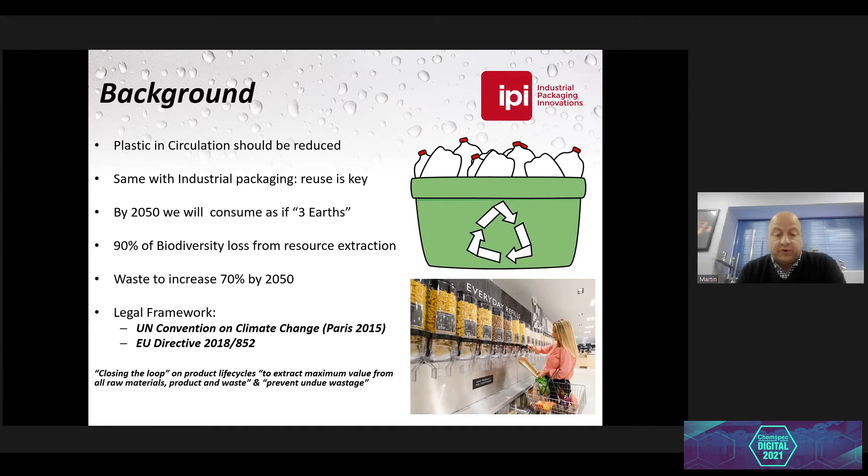The EU circular economy is very similar. The EU Commission has adopted an ambitious circular economy drive in parallel with this. The idea is to close the loop of product life cycles, with greater recycling and reuse, to extract the maximum value from raw materials and natural resources, saving energy and reducing greenhouse gases, and to benefit the environment and the economy.

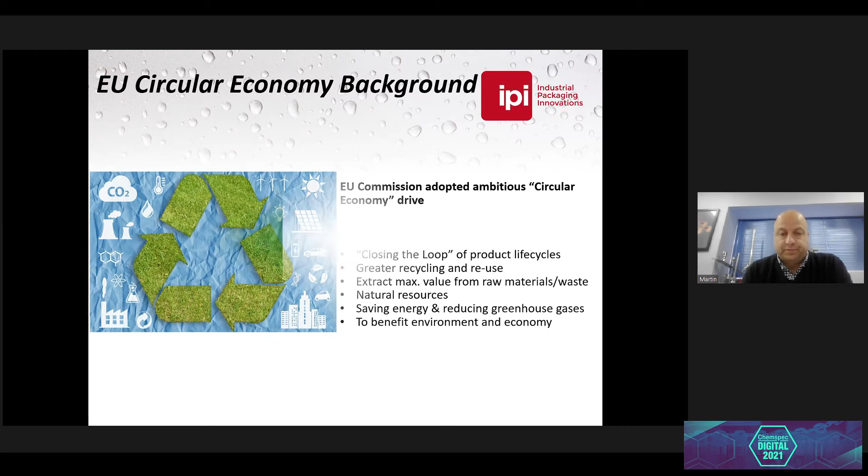A little bit more detail on that and how it works is the EU Green Deal. The EU Commission has launched the Green Deal to target no net emissions of greenhouse gases by 2050, to decouple economic growth from resource use, leaving no one behind. The action plan to achieve it is to boost efficient use of resources, to aim for a clean circular economy, to restore biodiversity, and to cut pollution.

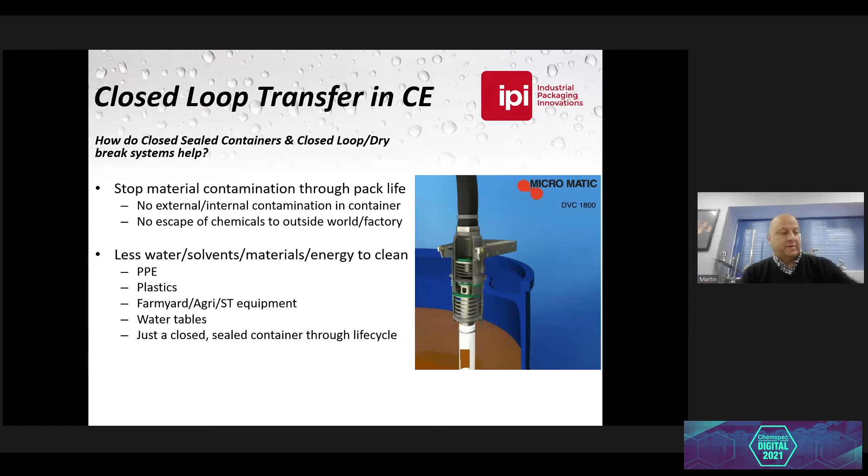And then closed loop transfer within the circular economy. So how do closed sealed systems and closed dry break systems help? They prevent the escape of vapors and drops. Hydrazine is an example where the amount in the atmosphere is kept below 0.02 parts per million, well in line with EU circular economy goals and protection of workers and the environment.

In IBCs with a closed loop system, they are reusable for the whole of the container's lifetime in a cycle of fill, ship, return, refill, fill, ship. So the closed system enables extending the life of the IBC or the container. It reduces the number of containers, reduces energy, water, and consumption, which is critical. And of course, you have a stainless steel IBC container option as well for ultimate lifetime.

On the right-hand side, you can see how the liquid is transferred from container to container. And then also the vapor is contained or recovered back into the container. So there's a two-way process, the liquid into one container, which pushes the vapor back into the original container. So it's a completely sealed system.

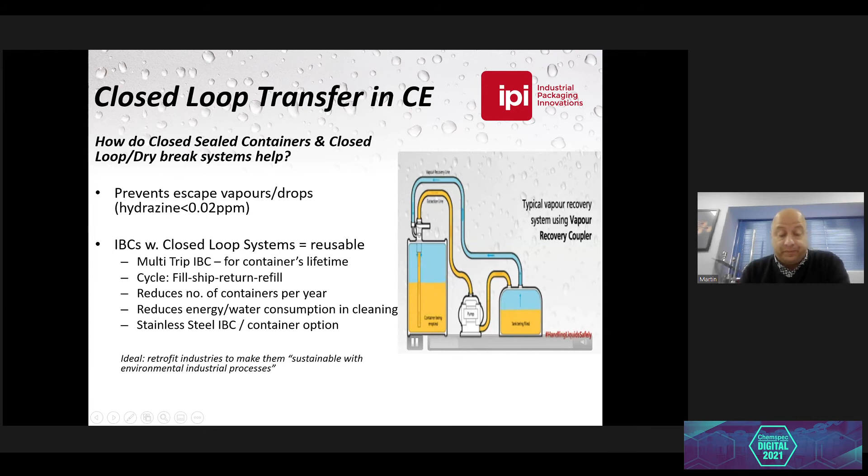I'm now going to show you a video which shows this in action. It's all very well saying, okay, how does this work in principle? But this is a company, Oqema, who have used the closed system within an IBC so that containers can be reused as long as the lifetime of the container can take it. I'll just play the video - it's about 3 minutes, and then I will pause at various points to explain it.

The initial part of the video shows the filling of the container at the customer's site. In this case, it's with hydrazine hydrate to go to a power station. So a little bit of scene setting there.

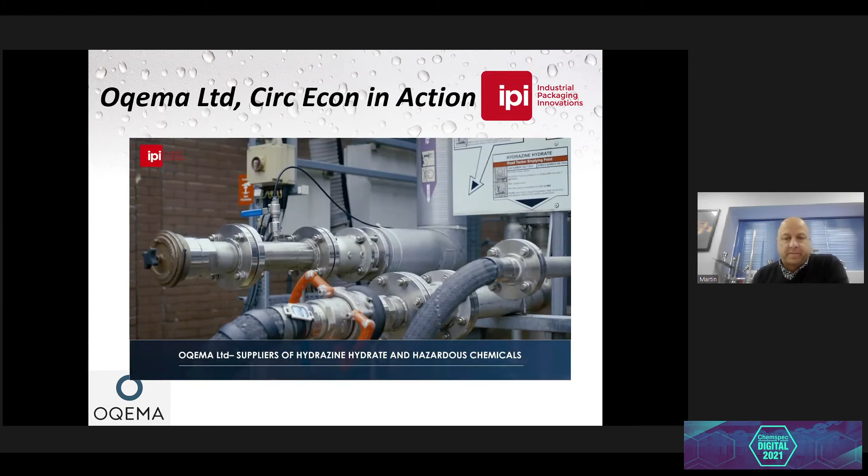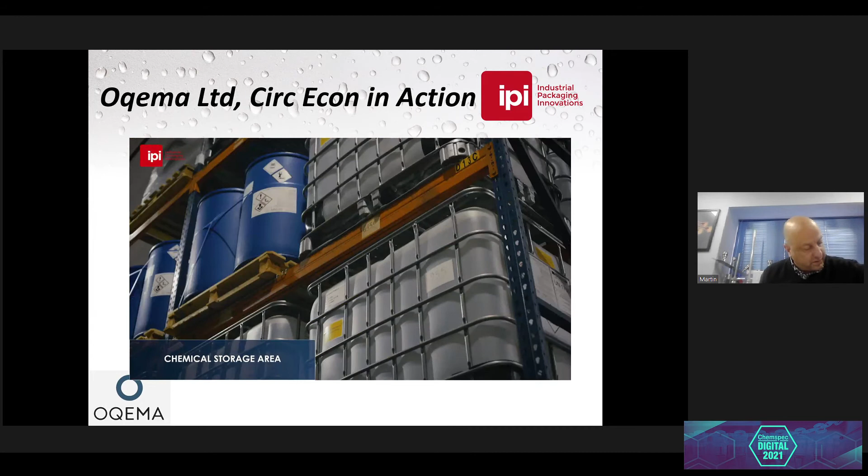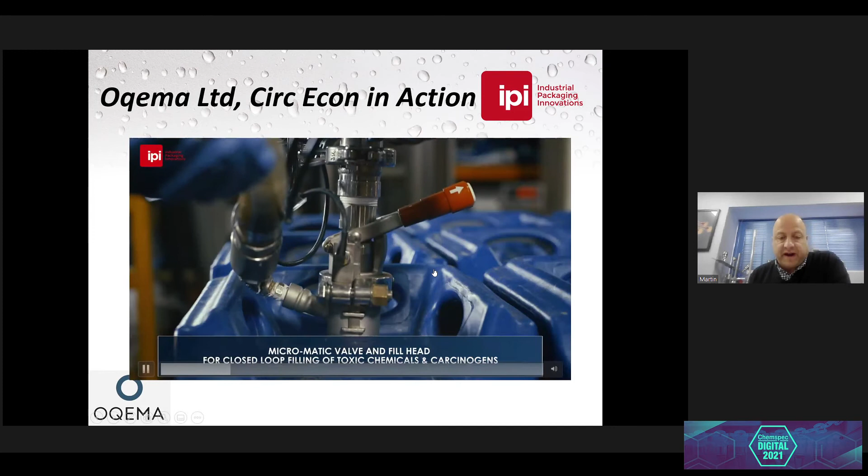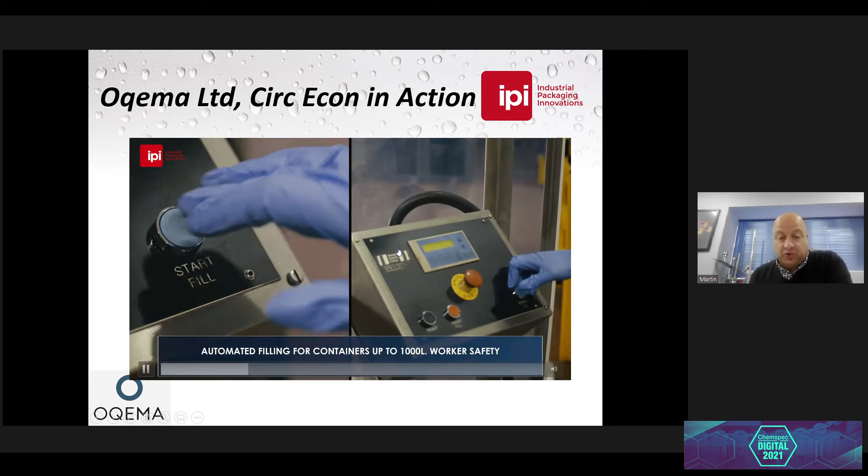So you can see various types of containers are filled from, that's a 25 litre can, up to a 200 litre, which you'll see in a moment, and an IBC, which you will also see. Totally secure filling.

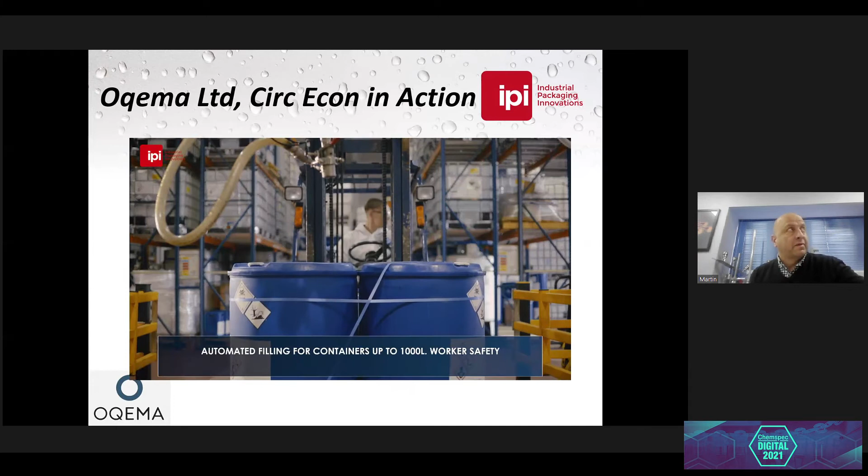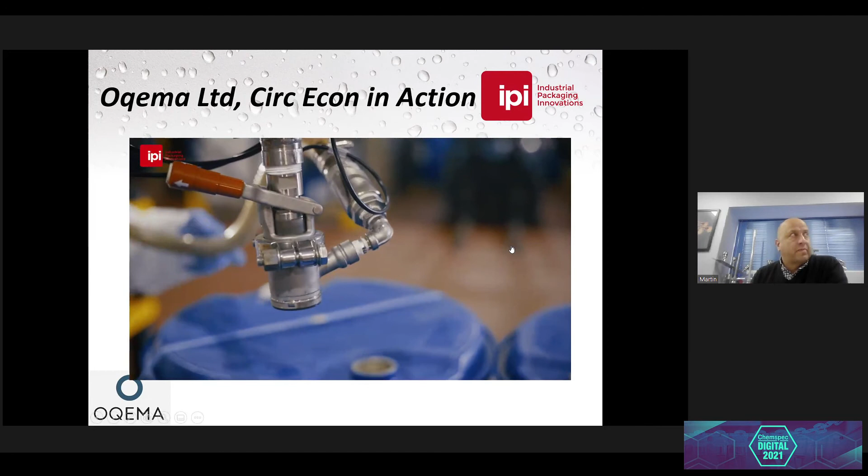It's been invaluable. It allows us to transfer carcinogenic chemicals safely at our facility with no exposure for operators, and also our customers can dispense products safely too with no exposure. We fill it through the valve here at Lansdowne. Our customers dispense through the same valve too. There's no exposure from the valve itself because everything's a closed system. It's a lot more robust because it's made of stainless steel, and it's provided us a high degree of integrity. It's been a real game changer for Lansdowne Chemicals.

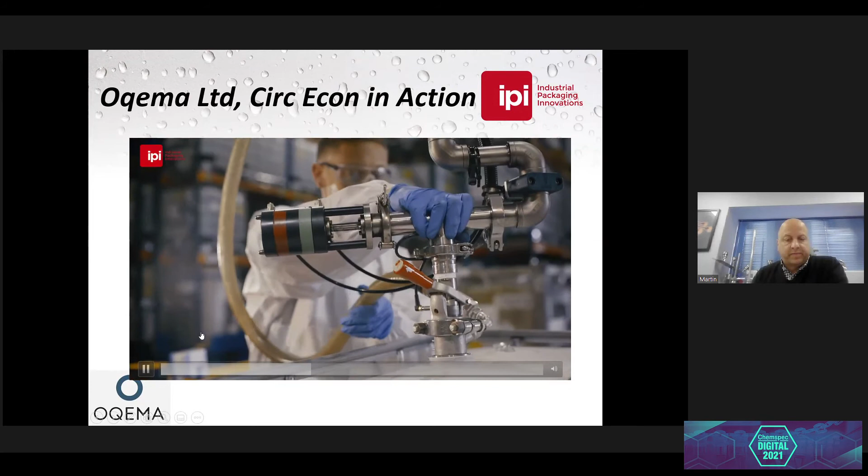Oh, sorry, moved on there. I shall go back to where I was. So what you've seen so far is the filling of the containers.

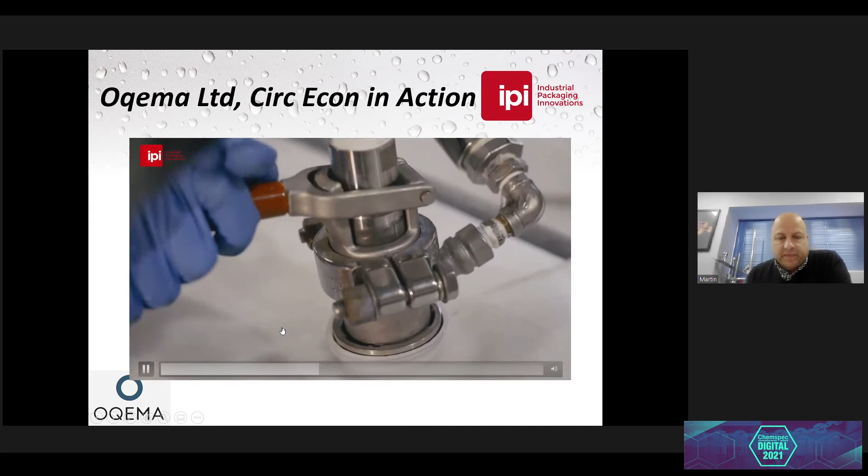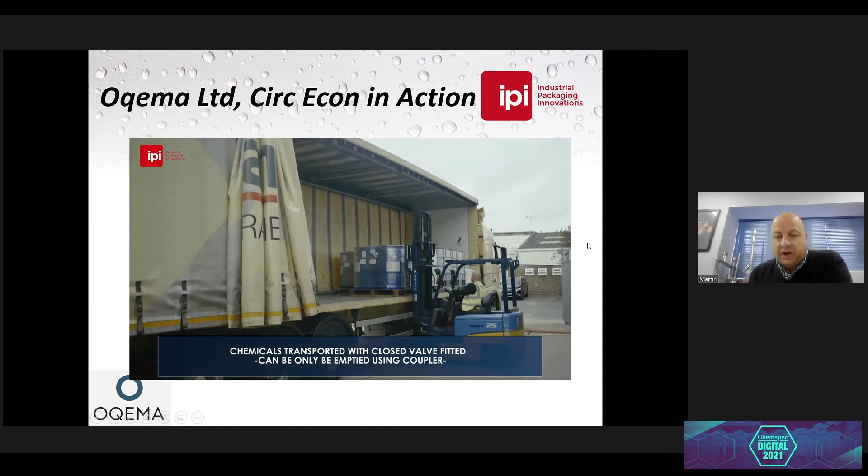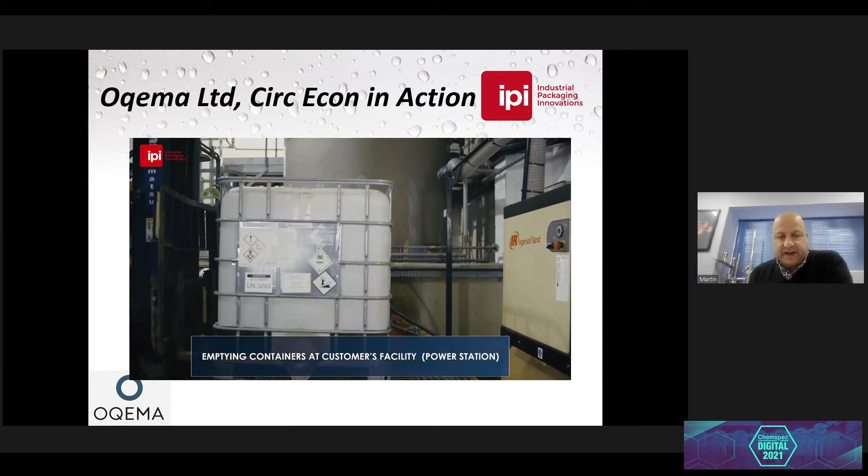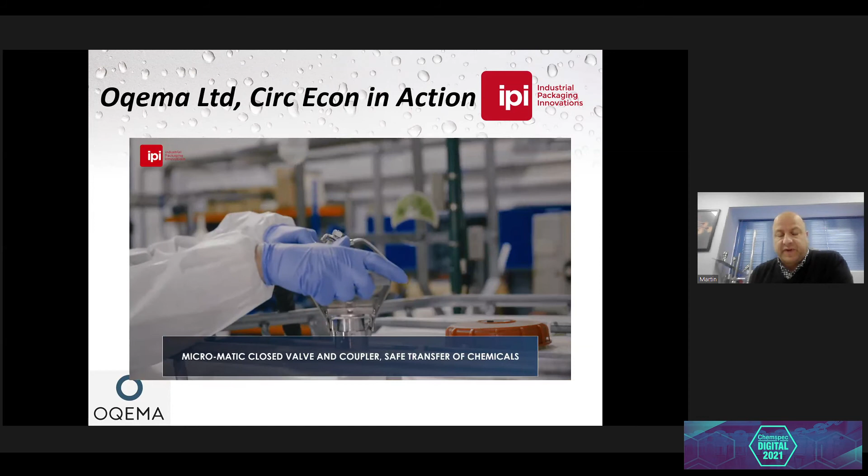Then you see the transport. In this case, they are taken to a power station where the hydrazine hydrate is used within the water supply within the power station to stop rusting and oxidation of the pipes. So here the container is taken into the power station and is emptied, again in a secure, safe manner to prevent exposure to the operator and the outside world.

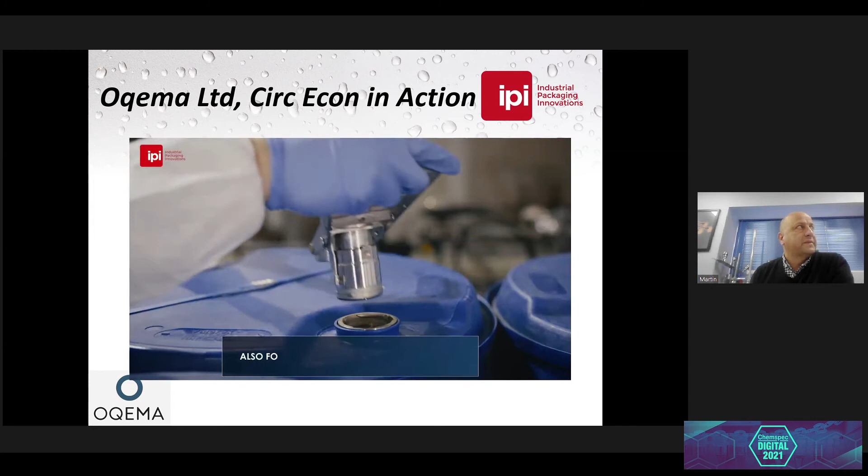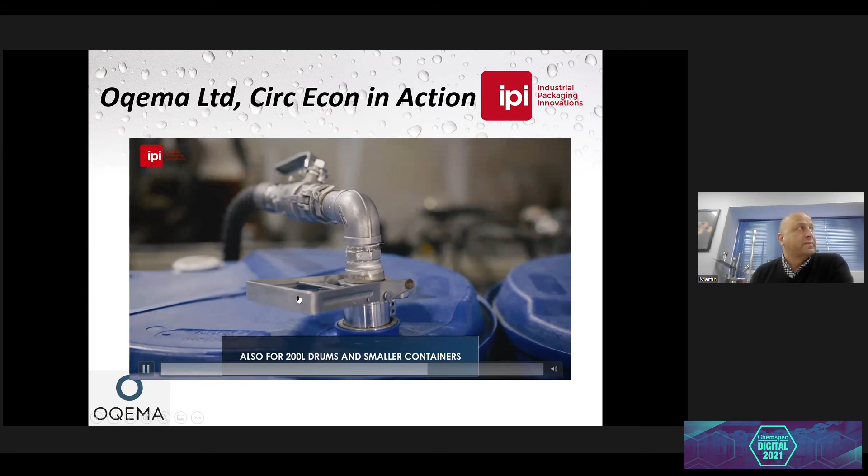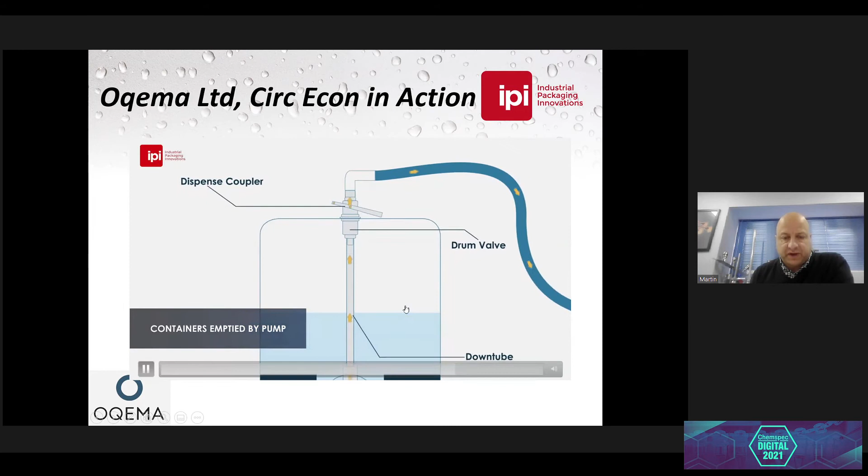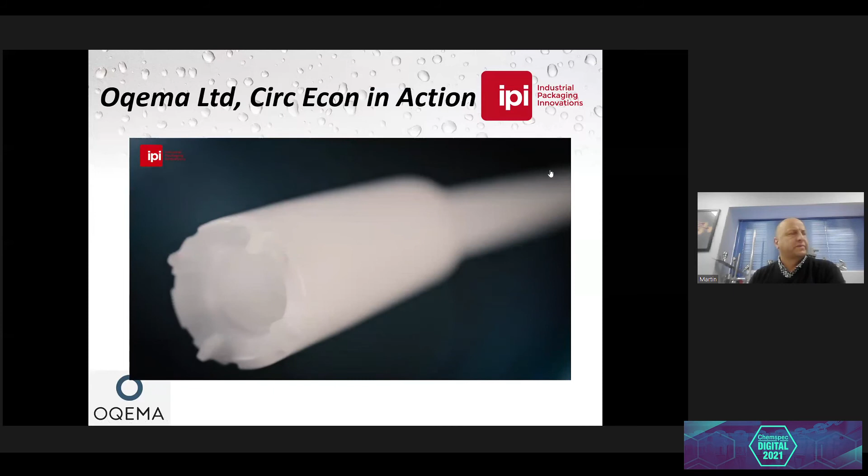And the various containers are emptied. And that's the principle. You can see there is a down tube that goes to the bottom of the container, and the container is emptied by pump. This is a subject of a study by the UK HSE, and it also complies with EU 2004-37 EC for carcinogens and the 89/391 EEC regulation.

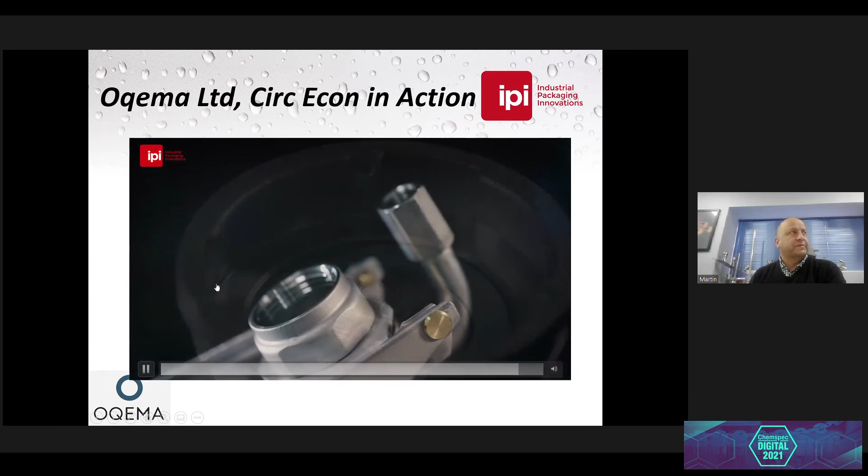So that's a nice summary of how it is used in action by companies for protection of workers and the environment and to achieve circular economy goals. It's all very well saying that. Companies will do that, they will protect their workers, the environment, but is there a financial aspect to this? Well, yes, there is. There is a benefit of following these principles.

Protecting our planet and futures is obviously very important, huge reduction in cleaning resources, but it has been shown that companies that invest in this kind of technology, it actually creates jobs and opportunities, and companies will benefit commercially from it. The estimated benefit is 1.8 trillion by 2030. That's a reduction in the net spend, according to EU estimates. So it is worth doing and worth looking at further.

So that's the end of the presentation. Thank you very much for your attention. And I would like to open up to any questions.